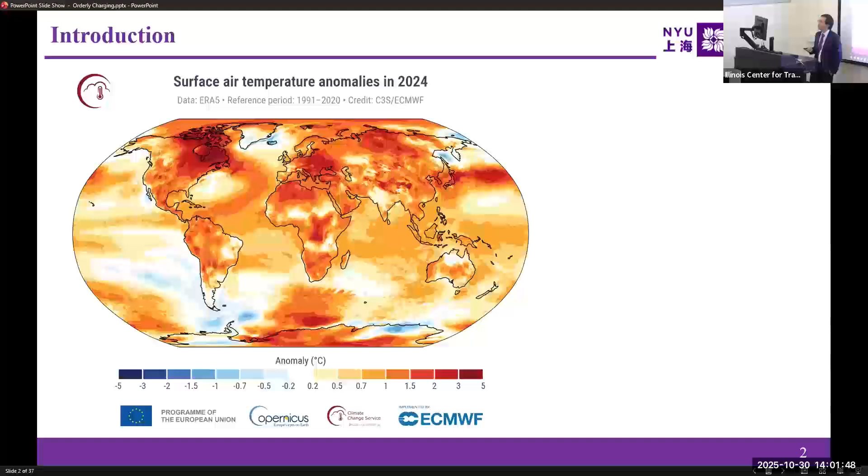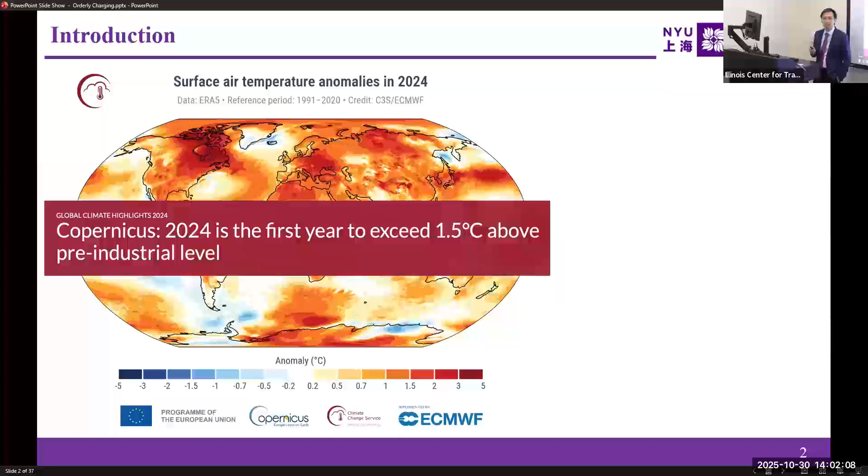So this figure plots the surface air temperature anomaly in 2024. It has been recorded that last year is the first year to exceed 1.5 degrees Celsius above pre-industrial levels. If some of you have heard about the Paris Agreement, you will notice that 1.5 degrees Celsius is an important Paris Agreement goal. Actually, we expect that we can control it. Unfortunately, this is the fact: we already reached 1.5 degrees Celsius. It suggests that we need to adopt more proactive action to control the temperature increment.

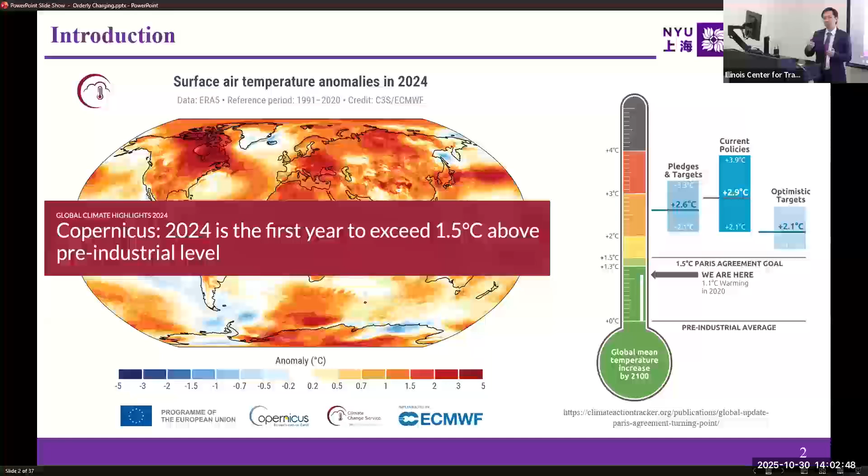Greenhouse gas emission is one of the major factors in the temperature increment. It was reported that the transport sector was responsible for 25% of global greenhouse gas emissions since 2010. Then we think, what if we can electrify the transport sector? Can we significantly reduce greenhouse gas emission? The good news is that electric vehicles may reduce the greenhouse gas emission contributed by the transport sector by 50 to 60% in Europe, and by approximately 40% globally. As a result, many countries and cities propose agendas to phase out gasoline vehicles and adopt electric vehicles.

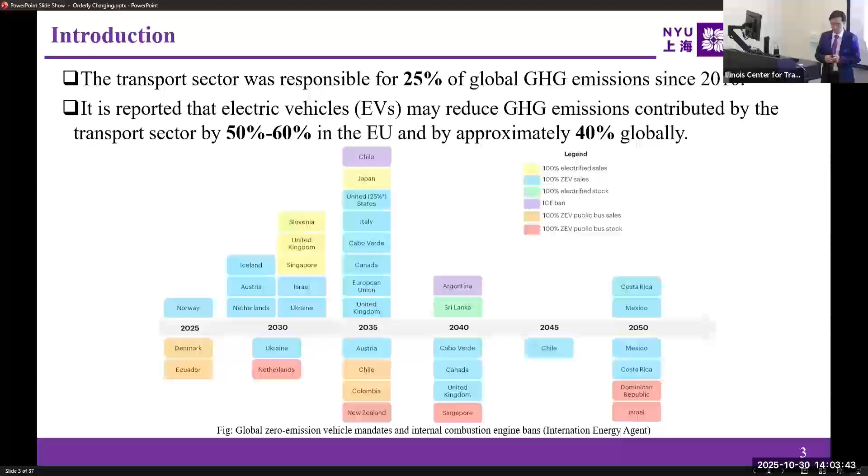However, the amount of carbon emission reduction yielded by electric vehicles heavily depends on their charging schedules. For example, if the electricity supporting the electric vehicle comes from a green energy source, such as wind power or solar power, the carbon dioxide emission is only 5 to 15 grams per kilowatt hour. But if the electricity comes from a polluting source, such as coal, it could be as high as 1 kilogram, 1,000 grams of carbon dioxide per kilowatt hour. So if the government would like to reduce greenhouse gas emission by adopting more electric vehicles, they need to investigate the maximum potential of carbon dioxide emission reduction brought by electric vehicles.

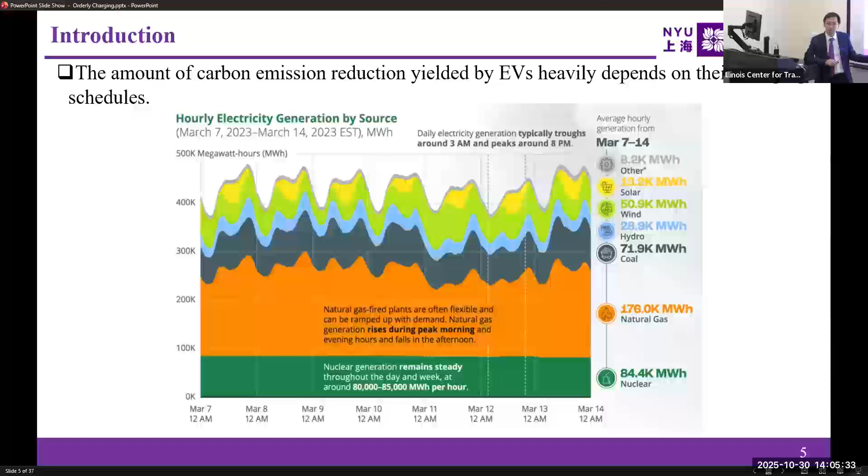This is another figure showing hourly electricity generation by source. As the time varies, the portion of electricity generated by different sources may vary significantly. So I use this figure to highlight that the charging schedule is really important. The question is, what's the maximum amount of carbon emission that can be reduced by electric vehicles when they behave properly, which we define as orderly charging behaviors? Answering this is equivalent to answering what's the potential of carbon emission reduction brought by electric vehicles. If such potential is pretty small, then we cannot count on electric vehicle adoption to reduce greenhouse gas emission.

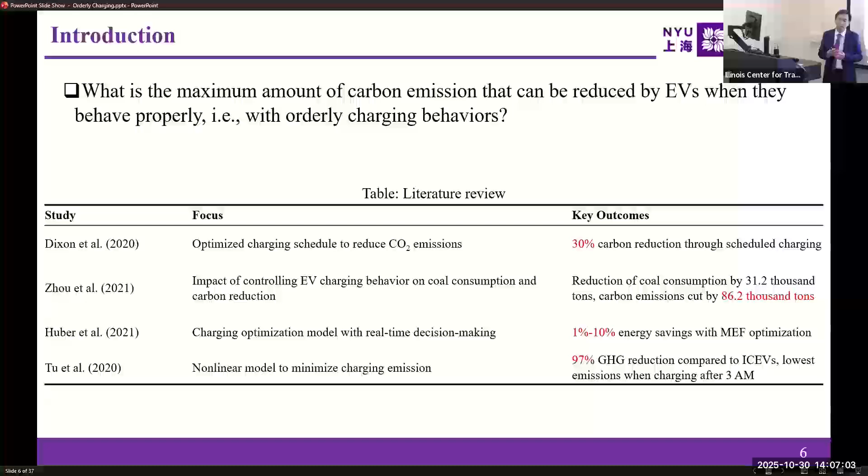Several scholars have conducted research to answer this question. For example, Dixon in 2020 calculated that 30% of carbon emission can be reduced through scheduled charging. This is good. However, Huber in 2021 mentioned that only 1 to 10% energy saving can be yielded by marginal emission factor optimization, which is related to the charging schedule. However, most of these studies were conducted based on simple data surveys or simulated profiles instead of real electric vehicle travel behavior.

So the problem is that by doing that, the estimation may not be accurate. For example, the survey in general is kind of biased, subjective, and also because if we only consider the survey or the simulated profile, we actually ignore the impact of charging behaviors on travelers' trip chains.

What does it mean? It means that, for example, in the survey I highlight that every day I need to charge 10 kilowatt hours from 6 to 8 p.m. Just for example. But the problem is, what if tomorrow I'm going to conduct a long trip? Definitely my charging plan will be affected, right? But within the survey, it's very difficult to capture this type of impact. I'm going to show you one example based on our real-world data.

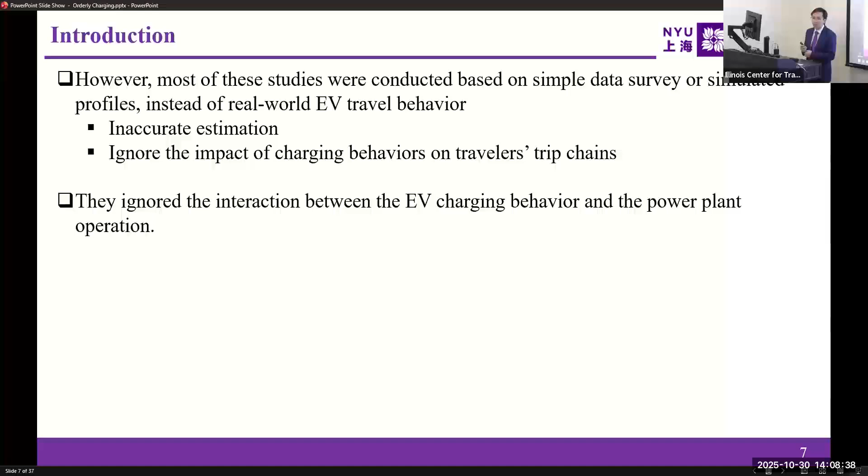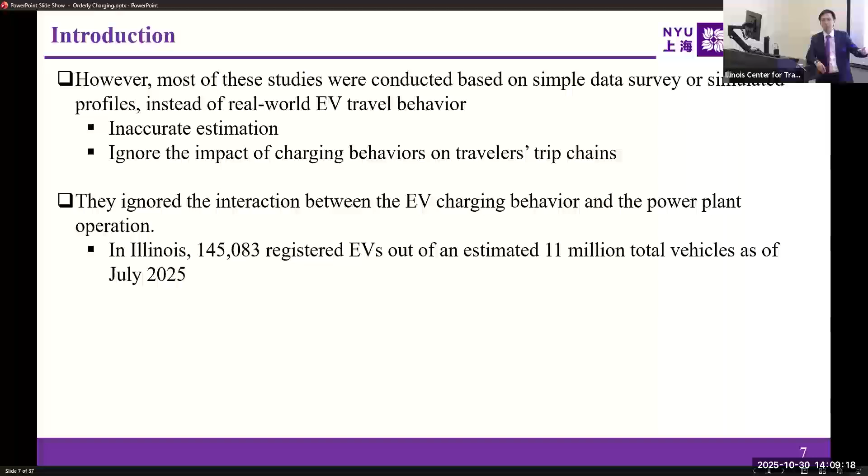Secondly, they ignore the interaction between the electric vehicle charging behavior and the power plant operation. What does it mean? It means that they assume that the change of the EV charging schedule will not affect the operation plan of the power plant. This is not good, but it works. For example, in states like Illinois, where the market penetration of electric vehicles is pretty small, between 1 to 2%, we can assume that the change of such a small number of electric vehicles' charging behavior will not affect the generation plan of the electricity.

Fair enough. However, if we consider a city like Shanghai, there are over 1.8 million registered electric vehicles. It already accounts for over 27%. This is not the sales market penetration; this is the total car ownership. It's close to 30%. So we cannot assume that the change of their behavior will not affect the power generation plan, right? 30%.

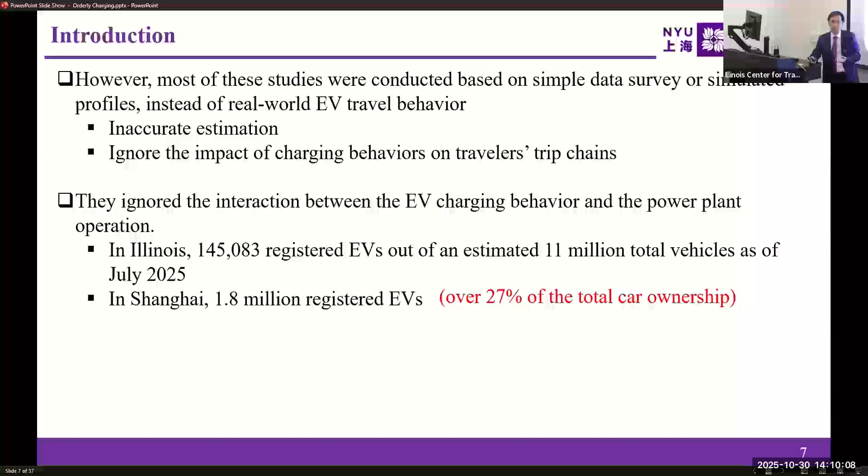So we would like to develop a modeling framework to quantify the value of orderly electric vehicle charging on carbon emission reduction by fulfilling the above two research gaps. Specifically, we are going to adopt the real-world electric vehicle user travel and charging behaviors, as well as the interaction between the electric vehicle charging behavior and the power plant operation. So those are the two research gaps we would like to fulfill.

Regarding the data set we adopt, we have access to 10,000 electric vehicles, a small data set, I would say. But at that moment, it was already the largest data set. About 60% of those vehicles are hybrid electric vehicles, and the remaining 40% are battery electric vehicles. In this study, we only consider the battery electric vehicles.

For each electric vehicle, we have data such as their battery size and the SOC, the state of charge, of each individual battery electric vehicle. We also have the cumulative mileage. Furthermore, we have the location information and the state information, for example, whether the event is traveling, charging or parked. We have all this data.

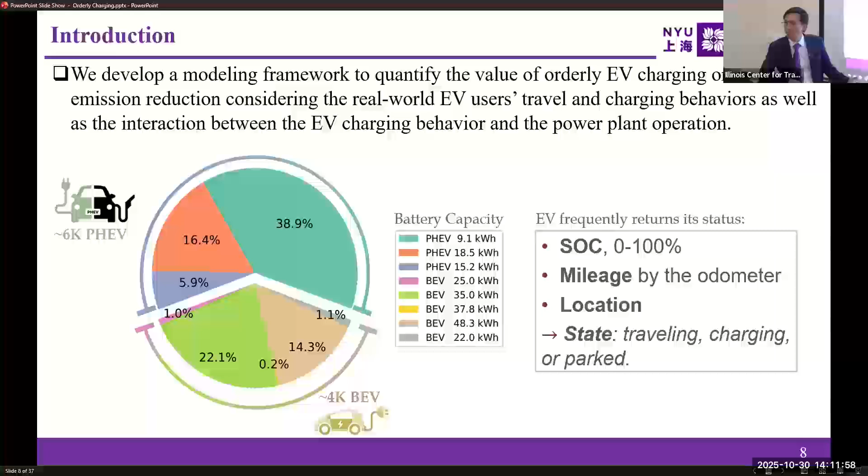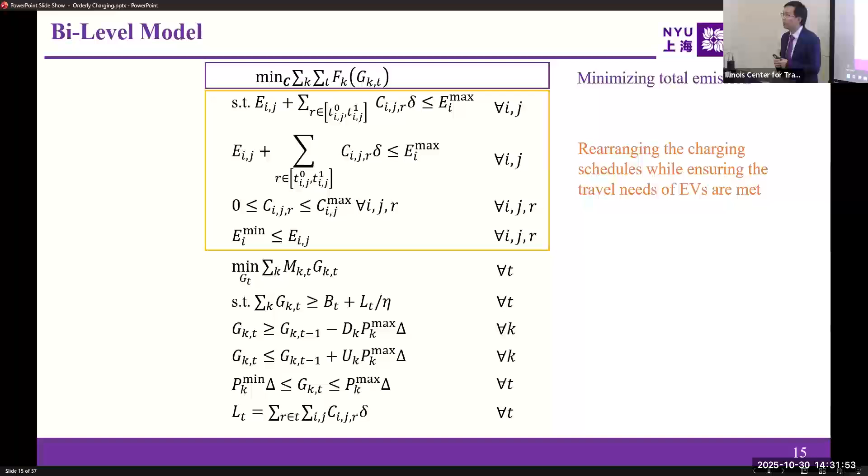Overall, this is the bi-level model. In the upper level, the objective function is to minimize the total emission, subject to the constraint of rearranging the charging schedules while ensuring the travel needs of electric vehicles are met. In the lower level, it's simply a power dispatch plan to minimize the total dispatch cost while satisfying the electricity demand.

However, such a bi-level problem is not easy to solve. First, it's a bi-level problem, and solving a bi-level problem is already complicated. Even if the lower level is a linear problem, we can use the KKT conditions to replace it and convert the whole problem into a single level problem, but with the complementarity constraints it is still not easy to solve.

Furthermore, these constraints hold for each battery electric vehicle. Nowadays in Shanghai, we have 1.8 million electric vehicles. If we would like to calculate it for 1.8 million electric vehicles, think about the number of constraints and the number of variables. It's a horrible number.

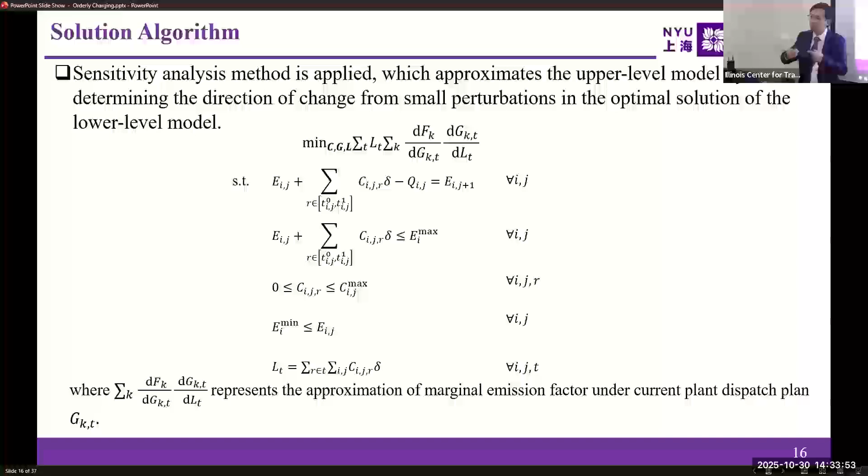But anyway, the solution algorithm is not the focus of our study. We adopt the sensitivity analysis algorithm to solve this problem. The core idea is to approximate the upper level problem by determining the direction of change from small perturbations in the optimal solution of the lower level problem. We derive the KKT conditions of the lower level problem, and identify the sensitivity of the lower level's output to the action from the upper level. So we can modify it as this one, but we need to solve it iteratively. This is the approach.

However, I would like to highlight that the number of constraints and variables is highly affected by the number of electric vehicles we consider. If we adopt a sensitivity analysis method, we can conduct parallel computing: we can execute the solution algorithm for each individual battery electric vehicle in parallel. By doing that, we can speed up significantly. No matter 1.8 million or 18 million electric vehicles, it will not affect our solution efficiency too much.

Then we turn to the electric vehicle data that we adopt. This study utilizes the charging and driving data from about 4,000 battery electric vehicles in Shanghai over 11 months, and includes more than 5 million driving records and 1.5 million charging records. The left-hand figure shows example charging profiles of 3 vehicles, showing how the electricity changes as time goes by. For example, if it is stable, it means the vehicle is just parked there.

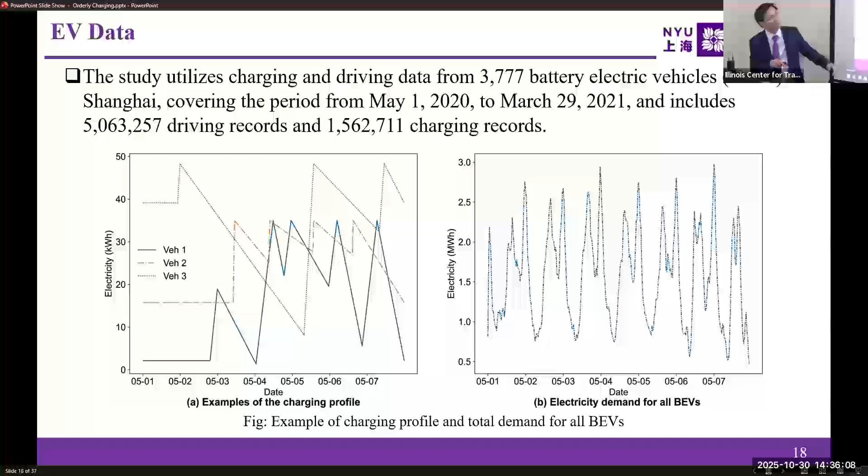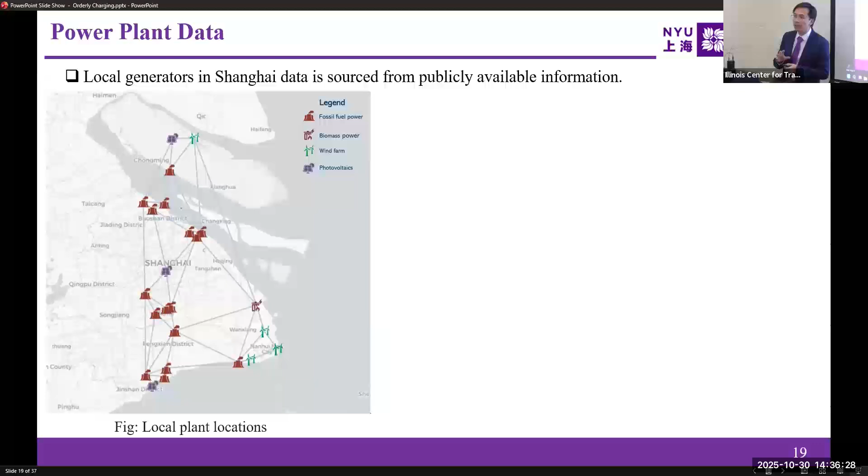And then in terms of the power plant data, actually we collect the local generator data in Shanghai, because this data is publicly available, so we collect it easily. And also we can collect the share of energy sources in Shanghai's local plants. For example, we have coal-fired, we have gas-fired, and we also have biomass and wind power, something

like that. But as you can see, for the coal-fired units, given the data, the proportion is close to 50%. It means that the electricity generation is not that clean, I would say, at least in Shanghai, based on this data.

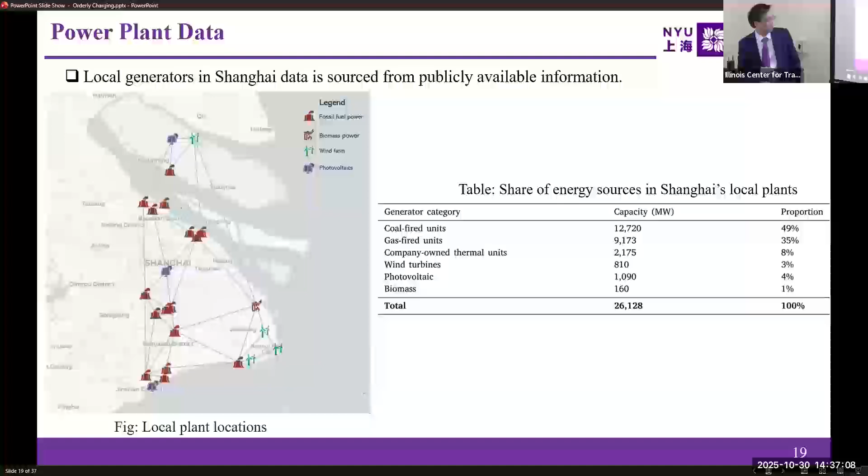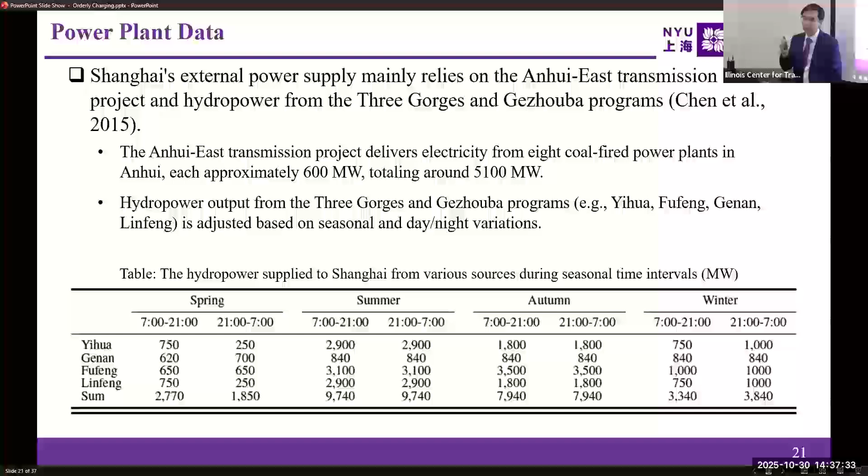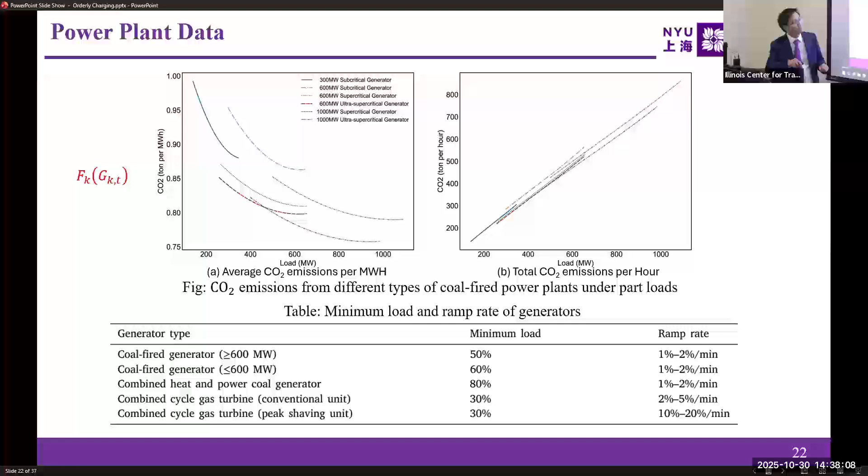However, for the non-electric vehicle electricity demand, we don't have the data because the data is kind of sensitive. It's not open to the public. Then we use Shanghai's hourly load curves as well as the Shanghai daily peak electricity demand curves. Based on these 2 figures, actually we generate the demand data by ourselves, such that new patterns can be realized.

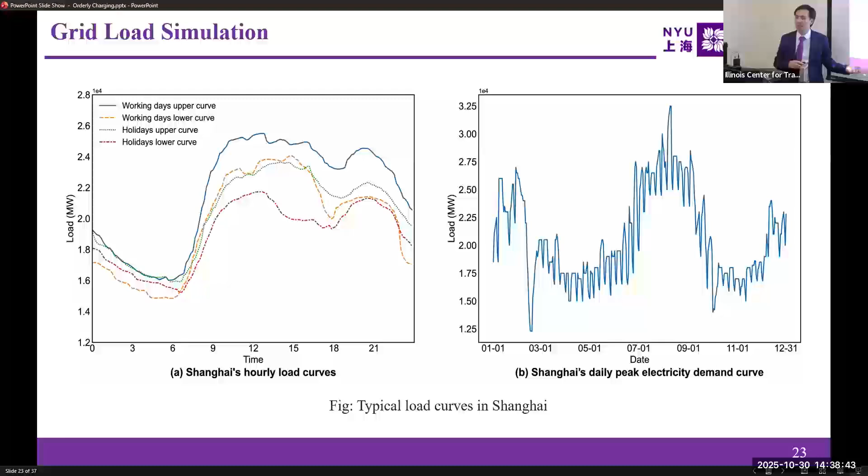So, some basic results. As of July 2022, when we got access to the data, actually there were only about 380,000 BEVs in Shanghai. You can see within the past 3 years there is a huge increment in terms of electric vehicles in Shanghai.

At the moment, the total number of battery electric vehicles is roughly 100 times the size of the data set. So we can consider our data set to occupy 1% of the whole. So the charging demand for these vehicles is assumed to be 100 times that of the data set we adopt, because at that moment we asked the officers from the center to randomly pick the battery electric vehicles. So we made such an assumption.

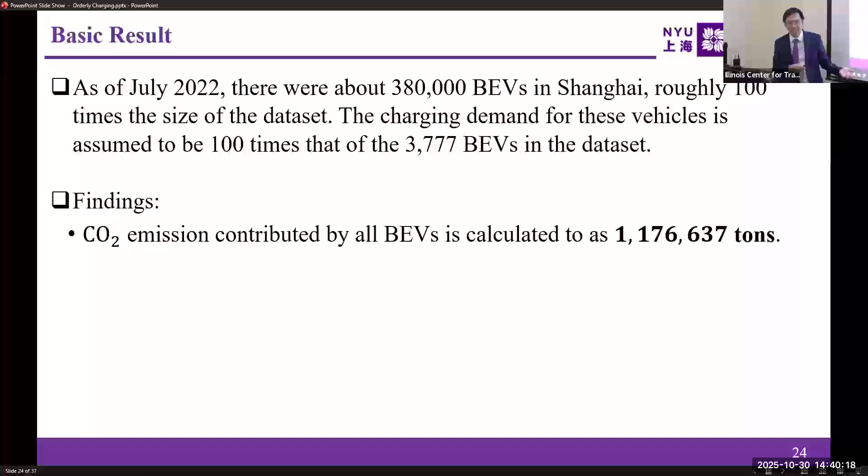Finding: the carbon dioxide emission contributed by all battery electric vehicles is calculated to be this number. You have no idea what this number means, but we convert it into grams per kilometer. So on average, the carbon dioxide emission rate for one battery electric vehicle is 73 grams per kilometer, representing a 57% reduction compared to conventional gasoline vehicles. And this is the emission for conventional gasoline passenger cars.

What does it mean? At the very beginning, some leadership of the national power grid in China had one concern: what if the electric vehicles' charging behavior is not well regulated? Will the carbon emission brought by these electric vehicles be more than that brought by gasoline vehicles? So this is the answer. Without any optimization, without any rescheduling, electric vehicles can still reduce carbon dioxide emission significantly.

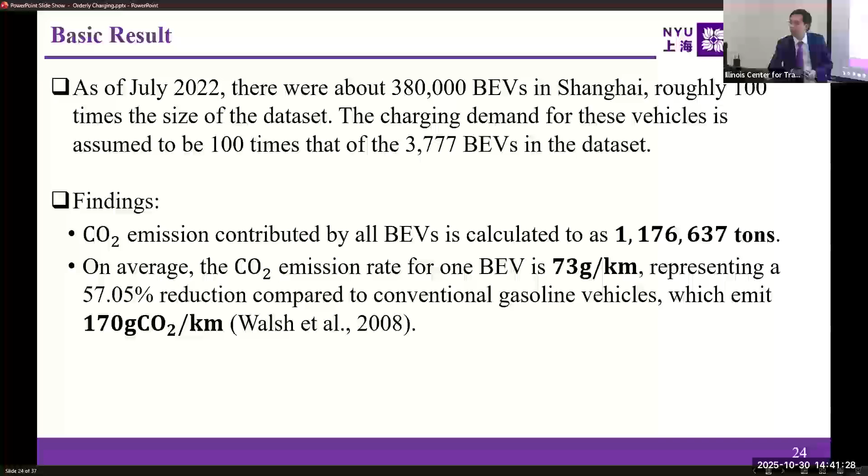And this is the seasonal changes in emission reduction. We can see in the summer, actually the emission is the highest, and as a result, the reduction per coordinated electric vehicle per day is also ranked the highest. But in terms of the ratio, actually in autumn, the reduction ratio is the maximum.

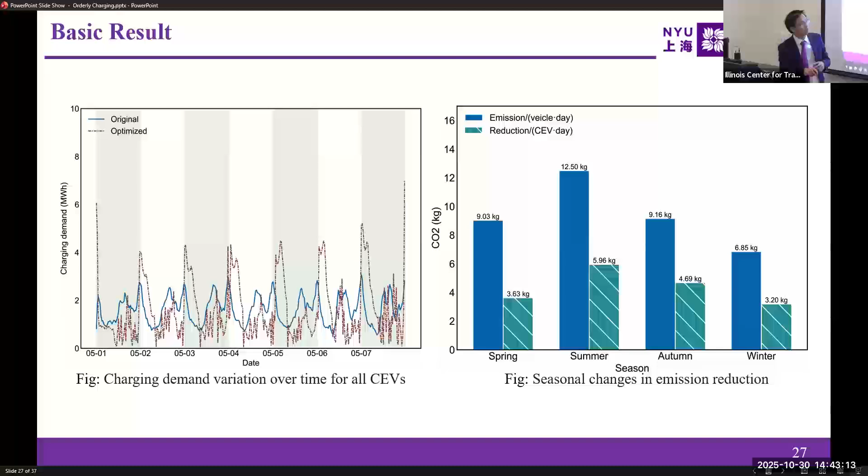And we highlight that not all the electric vehicle drivers or owners are willing to participate in this game, to follow the order of the central government or the strategy evaluator, right? So we test such a proportion. For example, 0.01 means that only 1% of the battery electric vehicle drivers are willing to cooperate with the central government. Then what's going to happen?

As we can see, as we increase the proportion of the CEVs, the reduction ratio will keep increasing. The more electric vehicles that we can control, definitely the more carbon emission that can be reduced. Fair enough, right? However, if you consider these bars, this is the CO2 reduction per CEV per day. We can see the reduction becomes marginal. It means that there's no need to control more if we only have a certain budget available.

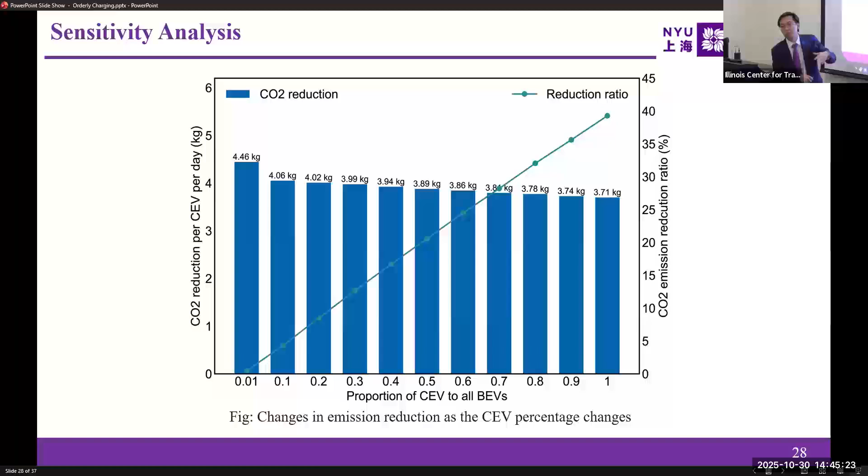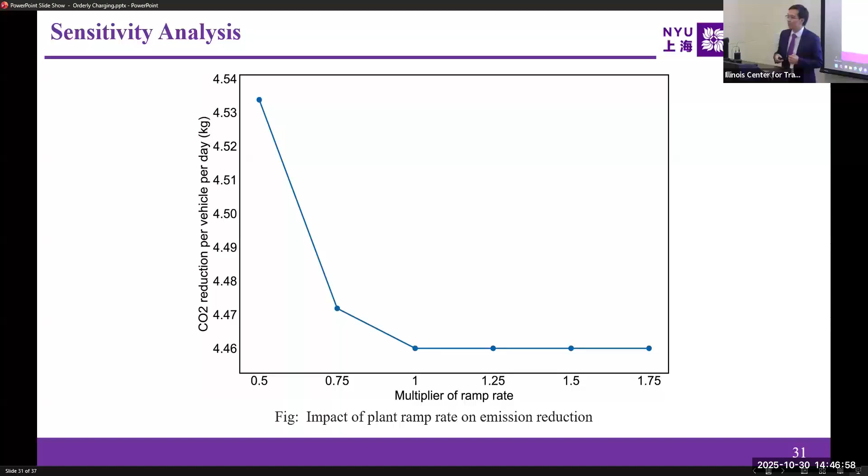And this is the impact of plant ramp rate on emission reduction. If the ramp rate is larger, it means the power plant is more flexible in terms of electricity generation. If it's more flexible, it suggests that the benefit brought by the CEV will actually be reducing. Fair enough, because now the power plant becomes more smart. Then the reduction contributed by the CEV side is going to be less.

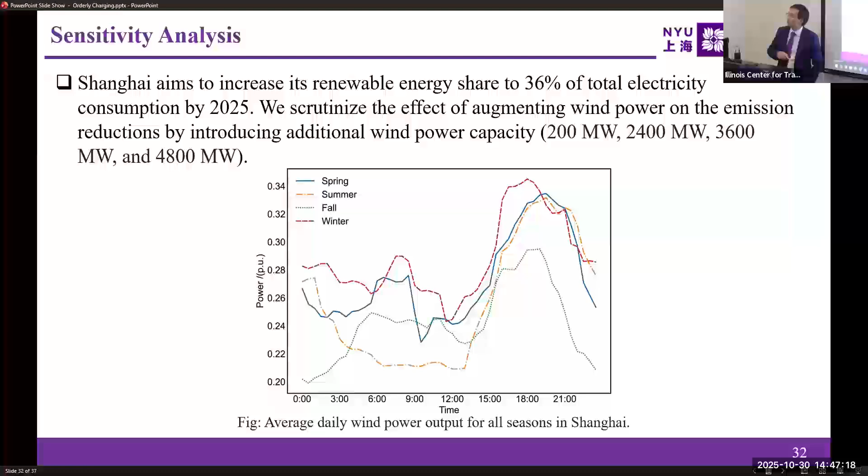And also we consider, what if we introduce additional wind power capacity to the power plant, and then what's the impact? As we can see, if we add more wind capacity, the source to generate the electricity becomes cleaner. Then the CO2 emission reduction is actually decreasing, because the energy is cleaner, so the carbon dioxide emission reduction contributed by the BEV will be reduced.

However, the reduction ratio keeps increasing. It means, as we have more clean energy, the original carbon emission contributed by the BEV is also decreasing significantly, even faster than these parts. And as a result, the ratio is increasing.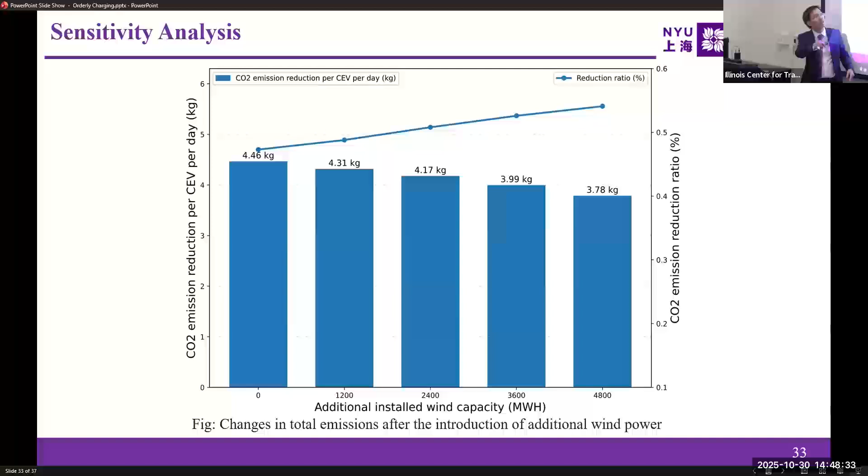Okay, it's over, right? Yeah. 2 minutes, right? We're not gonna leave it right now. Oh, okay, sorry. Okay, I'm gonna skip it.

So here's the conclusion.

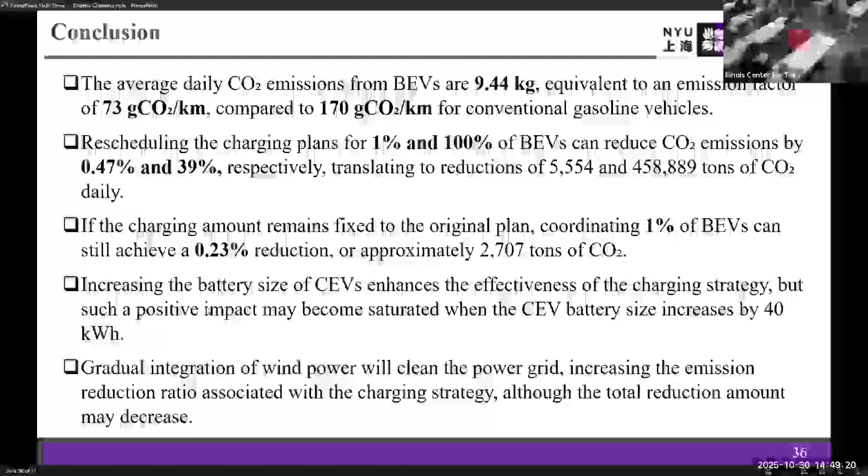I had a question about the charging window, because you mentioned it's very important. Right now you're considering it to be from the driving cycle before the charging until the next driving one, right? This one. Yes. So I was wondering, if the vehicle is parked but not being charged the whole time, would that be considered in the charging window?

Yes. But the charging window also includes the parking. Oh, you mean this part? Yeah, because it's from T3 to T6, right? So it includes also the parking, not just the charging, right? Yes, but if you look at this one, between T3 to T6, actually the car is not moving. So it means that it can be recharged anytime within this time window.

Yes. So, yeah, my question is, it could be that not all of T3 to T6 is charging. Of course, yes. We just need to set, for example, at T3, you don't want it to be recharged, right? Yes. You just need to set the corresponding C_{i,j,r} to be 0. And then that's okay, not charged. Okay, thank you.

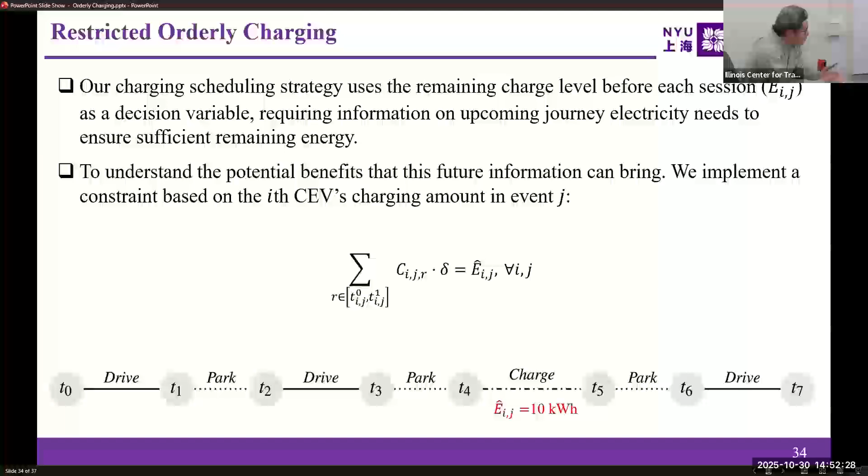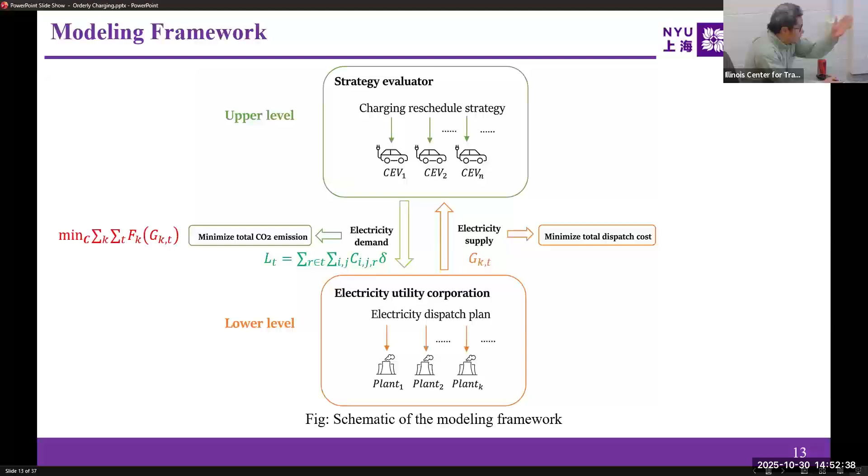Okay, and thank you also for the very interesting presentation. I just have a quick question about your choice of the upper and lower level. I've been wondering who is the leader, who is the follower here, and why. And another related question: you use individual EVs as the leader here, right? So you have multiple leaders. Is there any way you can aggregate them, since the spatial dimension is not really an issue here?

You have some Shanghai travelers, you are focusing on the temporal dimension, the windows. Is it possible to aggregate the EVs into a sort of flow instead of having individual vehicles? Essentially use a continuous variable for the number, you can treat it as continuous to avoid this integrality. I don't know if I'm clear in that question. Yeah, I think I get your point.

So first, in terms of the decision maker, the upper level is going to be the strategy evaluator. Think about it from the government's perspective. What I want to do is to investigate the potential. Or the other way is that you may have infeasibility in the lower level. For a certain upper level, maybe your power generator has a generation lower bound there, and you may not be feasible. Yes, you're right. So when we solve the problem, we need to consider that as well. Yeah, I was just wondering who makes the lead decision.

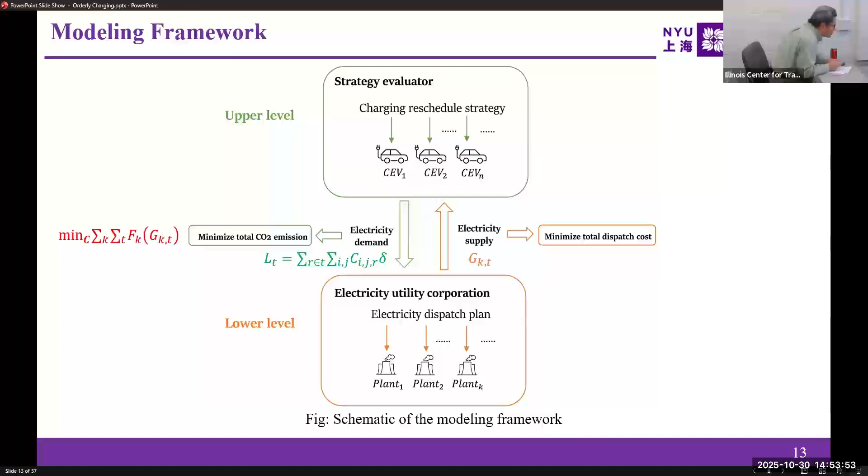And in terms of your second question, if we can aggregate them, that would be perfect. It means that we don't need to treat each vehicle individually. Yeah, we also thought about that, but we don't have a solution to that. But now the problem involves integer variables in this case. That's true. However, if we can consider the vehicles as continuous, then we can use traffic flow theory, right? Yes, that's what I'd treat it as, then that would be great.